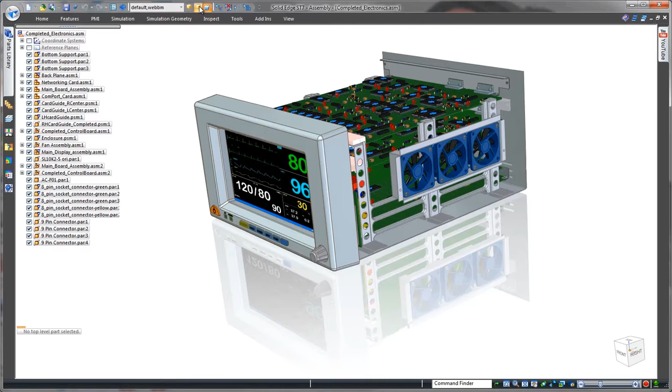We'll use Solid Edge to complete the enclosure of this heart rate monitor. Solid Edge with synchronous technology excels in sheet metal construction, allowing designers to efficiently work with surrounding components to define external product housings. In most CAD systems, the user has to modify a part independently from the overall product assembly. With Solid Edge, additional flanges can be created at the top-level assembly just by selecting and dragging the plate's thickness faces. No special command necessary.

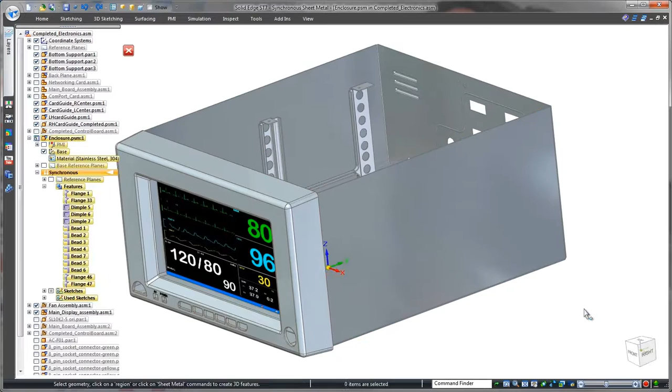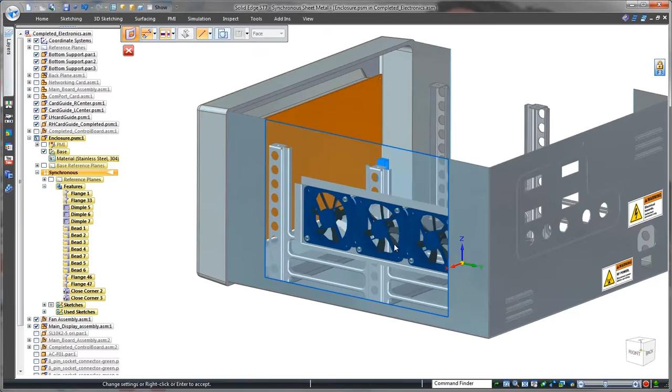Medical device manufacturers must adhere to strict government regulations, and any gaps between panels could be faulted. Using the close corner command, these gaps are eliminated. The internal circuitry produces a large amount of heat, so normal operation of this monitor relies on cooling fans. To provide clearance for airflow, we'll define rectangular cuts on both sides of the enclosure. Synchronous modeling provides several methods to intuitively match the size of these openings to the shape of the fan assembly. Now that was fast and easy.

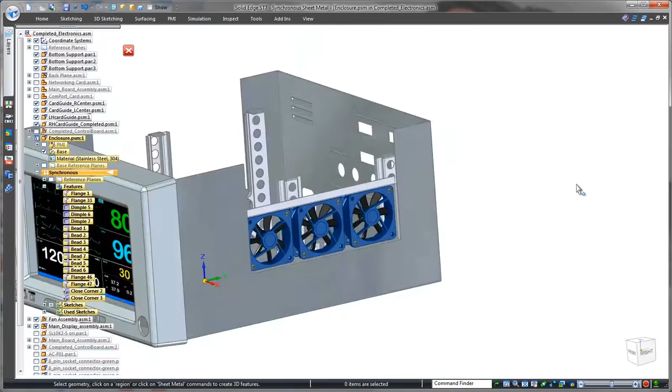Next, we need to create a locking tab for the enclosure's lid. Here we'll select the thickness face, but opt for a partial flange to create this tab. Using one of many handy options, we'll ensure its top is flush with the top of the part. We'll lock in a precise tab location using 3D dimensions. To meet safety requirements, simple rounds will remove sharp corners.

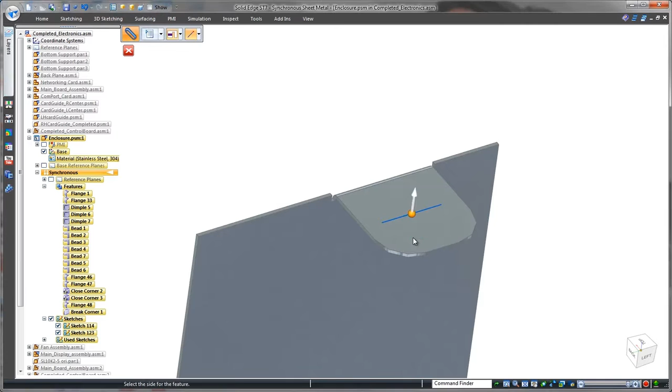The locking tab requires a starting slot, and Solid Edge needs only a sketch line to create the slot. We'll place a hole in the slot to complete the locking tab. We get the required clearance between the top of the locking tab and the lid by pushing the tab's top face deeper into the part. Another modification made easy. The locking tab needs to be stiffened, so we'll use the gusset command. Simply specify 2 gussets and Solid Edge automatically computes the spacing between them.

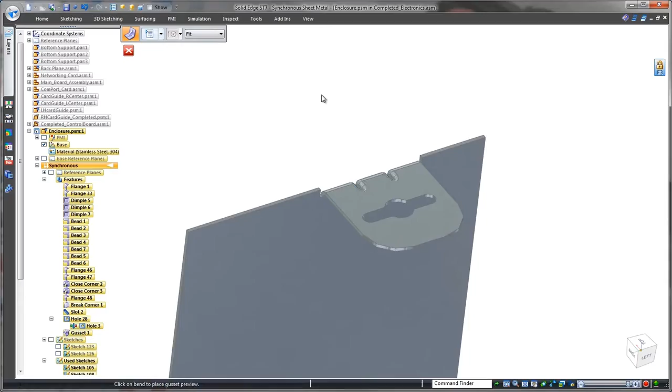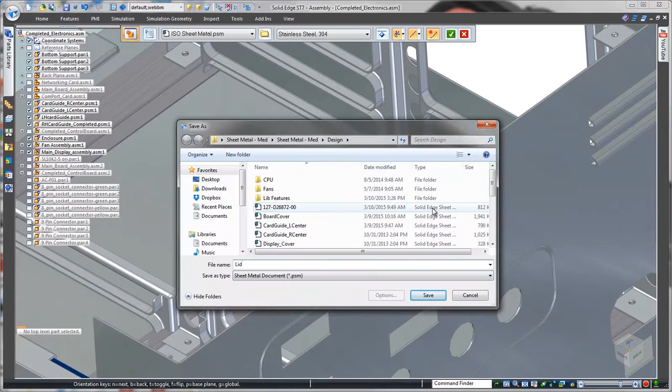Since an identical tab is needed to lock the lid on the opposite side, we'll quickly fence select and mirror these features to the other side. This completes the design of the enclosure's base. Now we'll create the lid. This is where the power of Solid Edge top-down design is realized. By constructing our housing in the context of surrounding components, we can ensure all holes align and mating parts match the first time, avoiding costly rework and eliminating scrap.

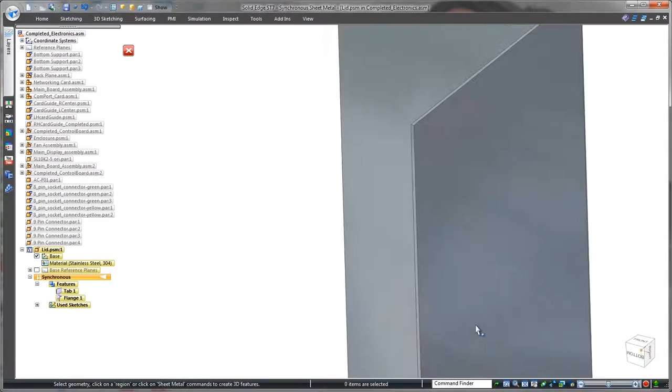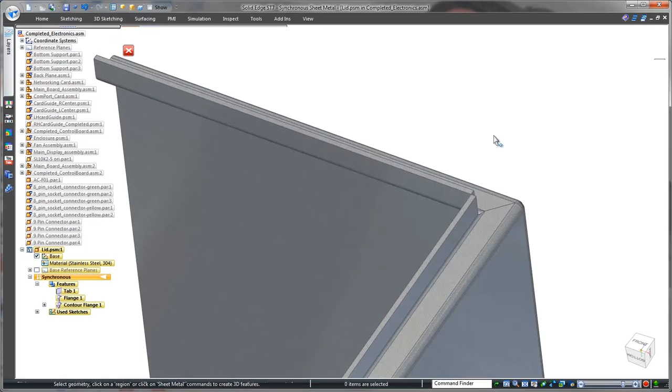As before, we'll create a new flange just by dragging the lid panel's thickness face to the length we need. On the front of the lid, we need a flange that wraps to the underside of the control panel. The contour flange command not only creates a more complex flange that will fit just right, it also allows us to close the inside corners too. Notice this bend radius doesn't match the rounded corner of the control panel. No need to access the history tree, just select the bend and change the radius. Again, that was easy.

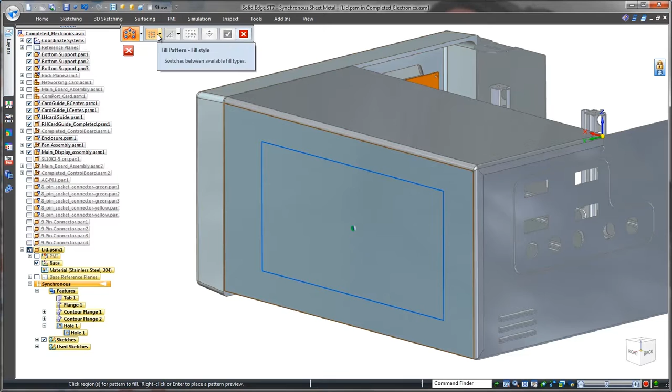Remember the fans? Proper operation will require a vent on the side of the lid. We'll create this vent by sketching a rectangle to define the vent's extent and patterning a hole using the fill option. It's as simple as that. Notice that we have an interference problem between the lid and the front of the control panel. Applying a synchronous relationship will move the vertical flange flush with the control panel's thickness face. That was an easy fix. We'll finish the enclosure by mirroring this lid half around the thickness face of the part.

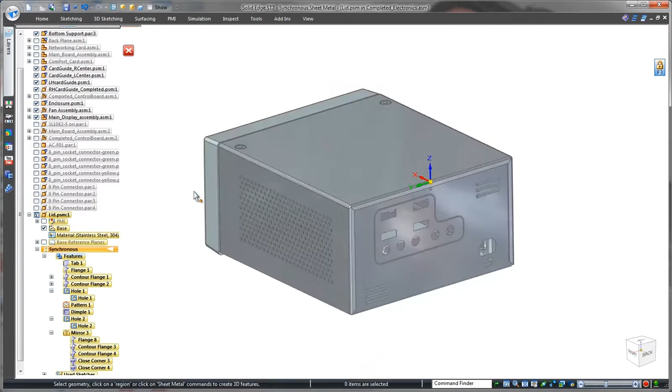Solid Edge facilitates creation of manufacturing information, often with little user intervention. Watch as we automatically derive a bend table from the lid model. Finally, we'll generate a flat pattern for use in a downstream manufacturing drawing. In this case, we'll insert the bend table and add a few coordinate dimensions.

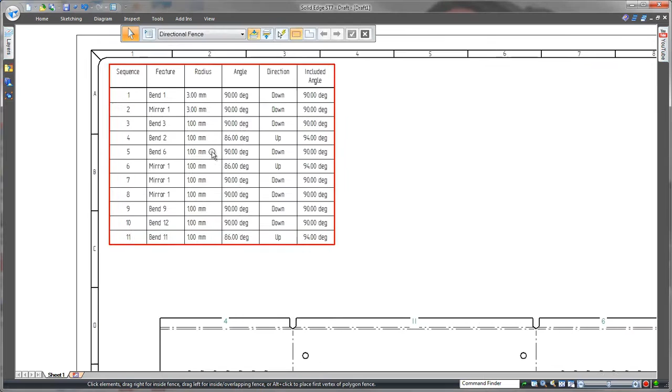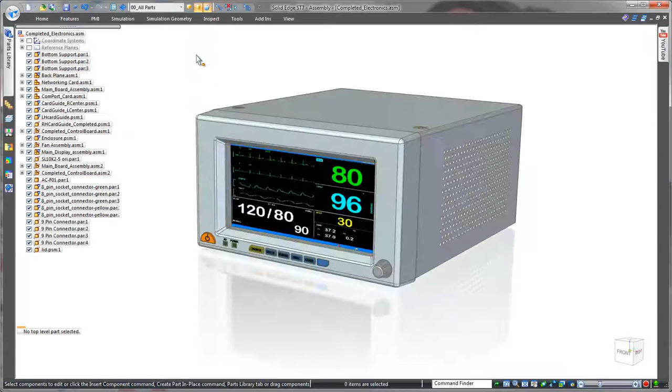Direct interaction with surrounding geometry, coupled with industry-leading sheet metal design tools and innovative modeling capabilities, makes Solid Edge the choice for companies looking for an edge over the competition. Solid Edge. Design better.